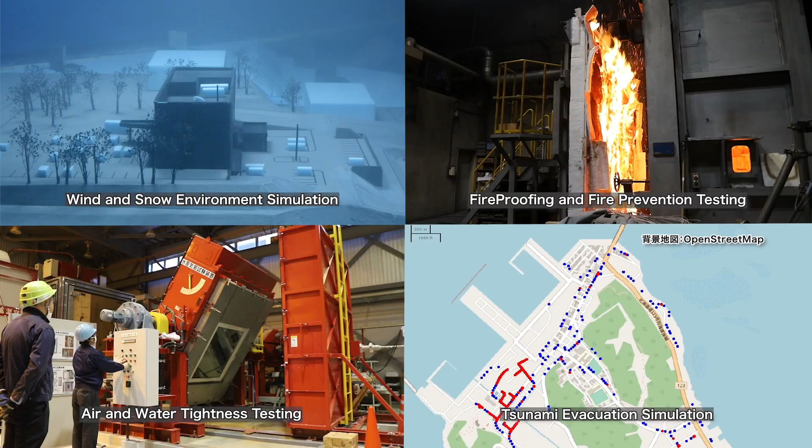The Building Research Department was established in Sapporo in 1955 to improve quality of life in Hokkaido through researching the planning and development of cities and housing in cold regions. We moved to Asahikawa in 2002.

The Northern Regional Building Research Institute, or Hokusoken, conducts research for both Hokkaido Prefecture and private companies, funded by the government and various foundations. Our research here can be divided into 4 main fields. Here is an overview of our recent efforts.

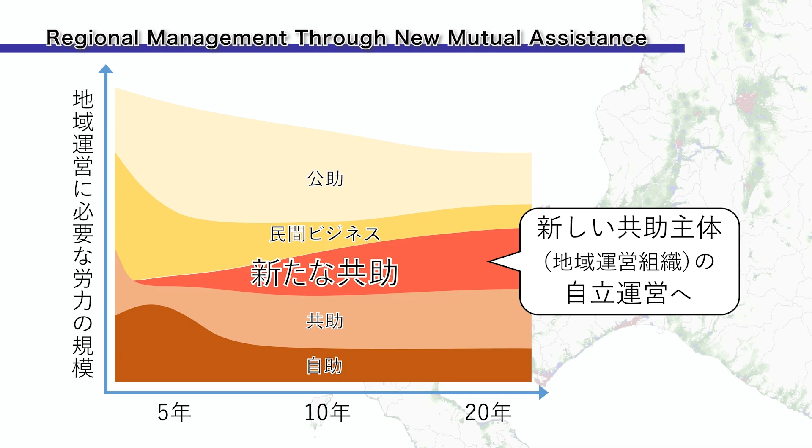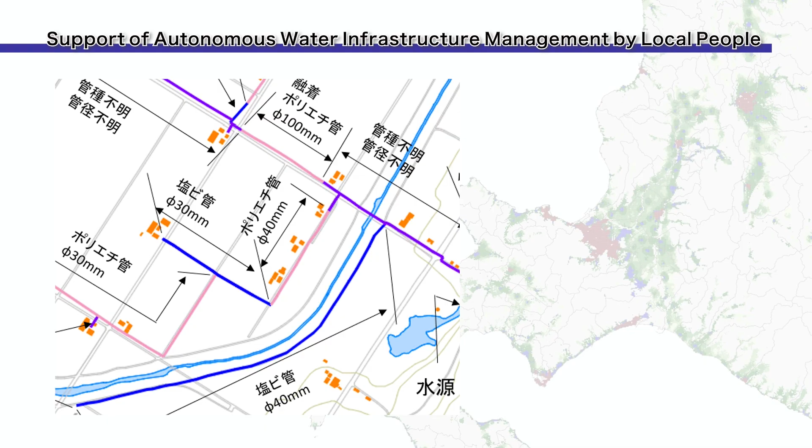Management of communities and housing. We are working on the research and implementation of regional management through new mutual assistance in communities facing declining population, falling birth rate, and aging population. For example, we are seeking a way to build systems to maintain local water infrastructures in cooperation with the local government, residents, and high school students.

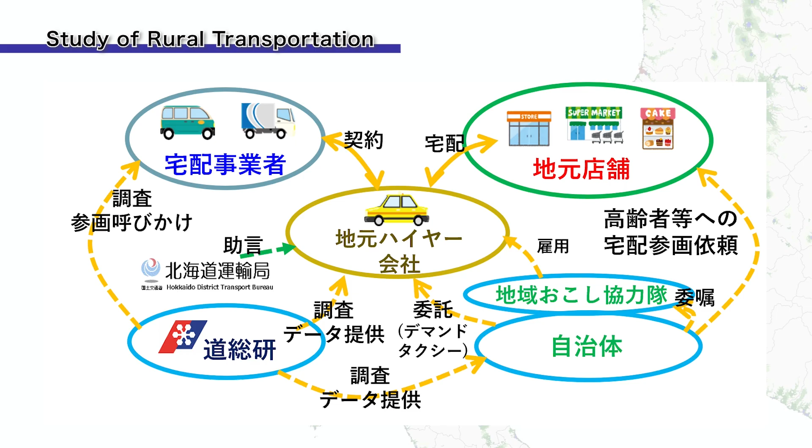We are also examining the feasibility of transportation operated by collaboration between local governments, residents, and businesses in regions where public transportation and local logistics have become difficult to sustain. In the field of housing, we cooperate with the government in policymaking and developing technology to popularize Northern-style housing as housing standard in Hokkaido. We are also working on enhancing the utilization of vacant houses and preventing houses from being left vacant.

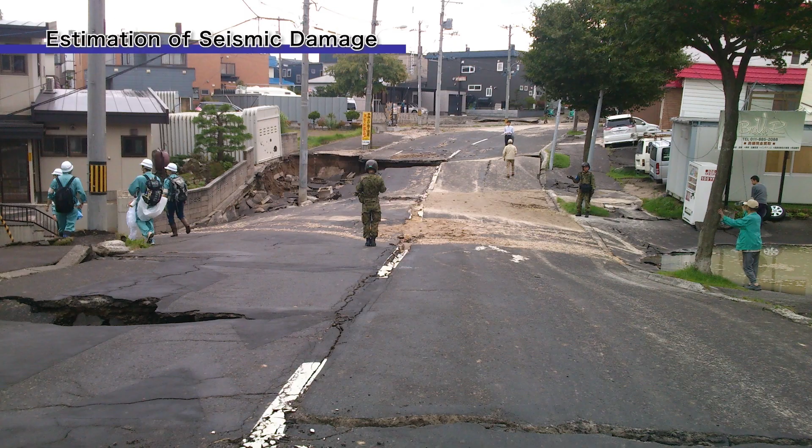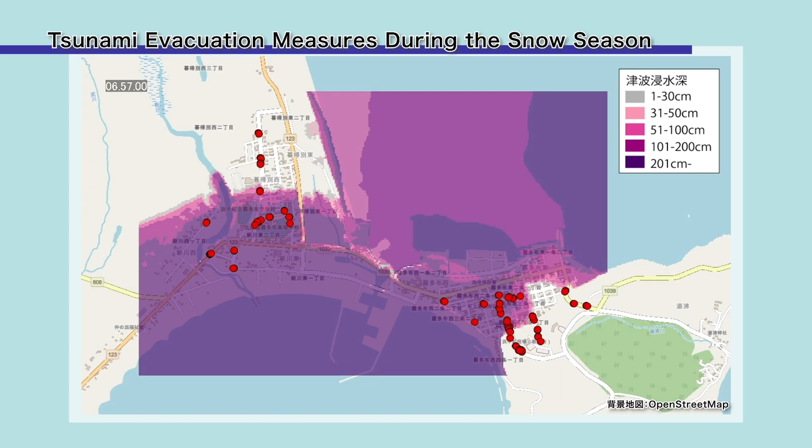Building safe communities. To promote disaster preparedness for earthquakes in Hokkaido, we are researching scenario earthquakes and damage estimation, as well as verifying the effectiveness of various disaster mitigation strategies. We measure actual evacuation speeds during the snowy season with evacuation drills to improve accuracy of damage estimates. And we assist in creating municipal tsunami evacuation plans as well as the construction of tsunami evacuation buildings.

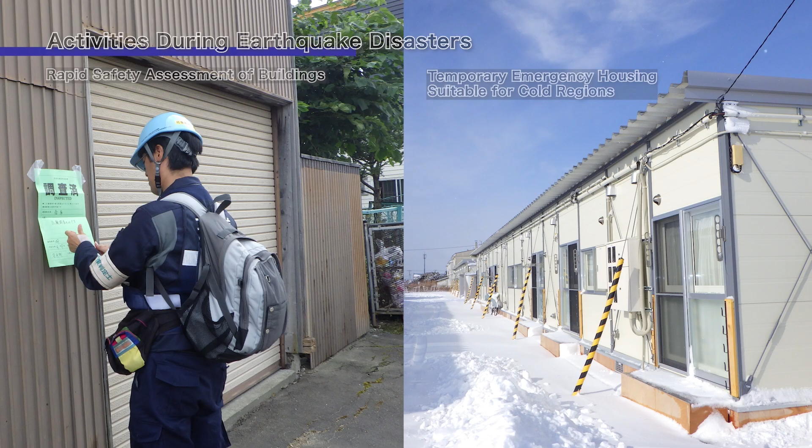During the 2018 Hokkaido Eastern Iburi earthquake, we collaborated with local governments to conduct rapid safety assessment of buildings and provided technical guidance on temporary emergency housing suitable for cold regions.

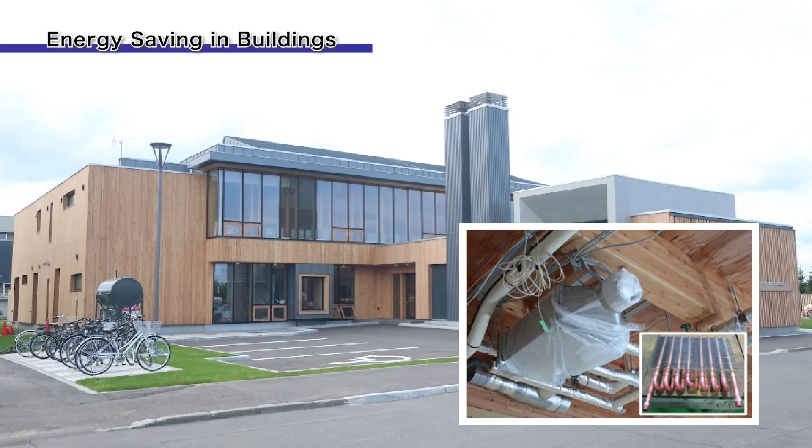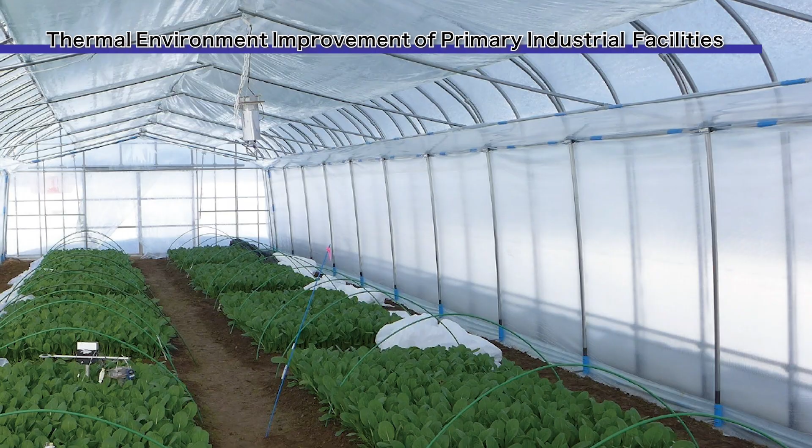Architectural environments and energy saving. We are developing technology of energy saving utilizing renewable energy for government buildings and schools. In collaboration with research institutes within Dosoken, we propose use of new technologies in environmental control to achieve thermal environments that enhance the productivity of greenhouses and other production facilities.

In response to Hokkaido's high demand for heat in the winter, we engage in research for energy conservation and utilization of renewable energy in the region.

Good quality building stock. In order to prolong the health of buildings, we developed rational, labor-saving inspection and evaluation methods to support municipalities in building stock management.

In order to increase demand for Hokkaido timber, we have developed and commercialized the fire prevention wood wall, which allows the use of wood for exterior walls at a low cost while meeting Hokkaido's high specifications for insulation. In addition to commissioned experiments, evaluation of architectural performance, and structural calculation conformity judgment, the Building Performance Testing Center conducts fundamental research aimed at improving measurement and analysis techniques.

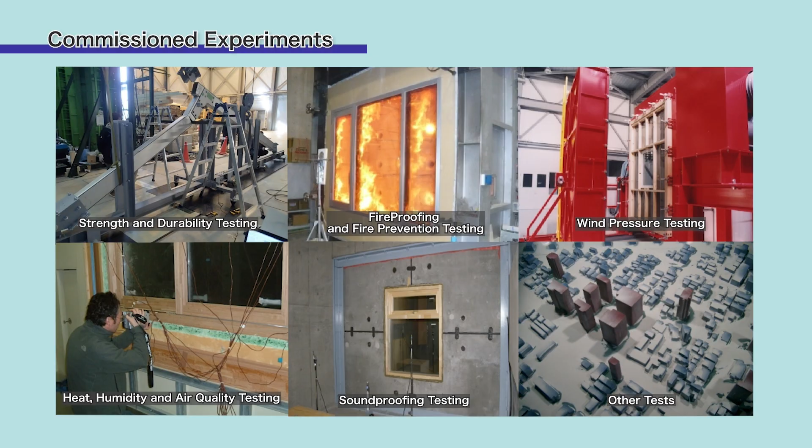For commissioned experiments, we provide tests as shown here. Usage of our facilities allows us to provide development of products and technologies for various companies and organizations.

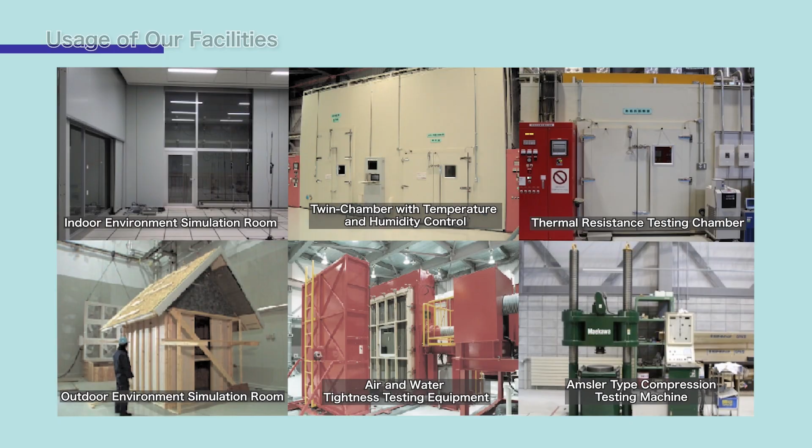This is a designated evaluation of architectural performance agency appointed by the Ministry of Land, Infrastructure, Transport, and Tourism for fireproof construction and development of fireproof materials. As the only agency of its kind in Hokkaido, it provides evaluation of architectural performance based on the Building Standards Act.

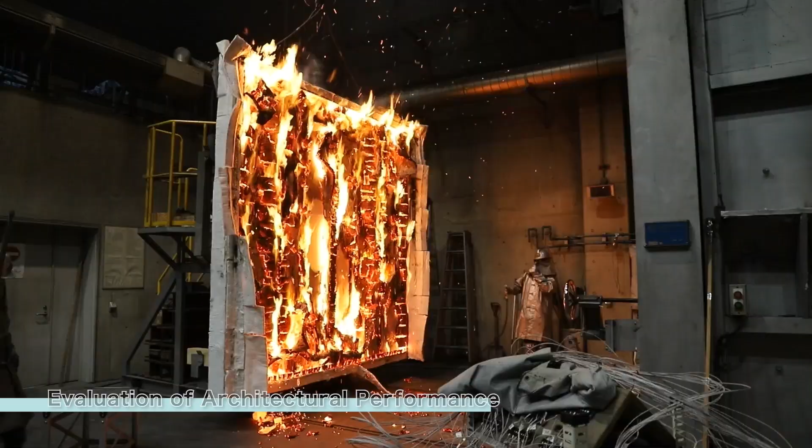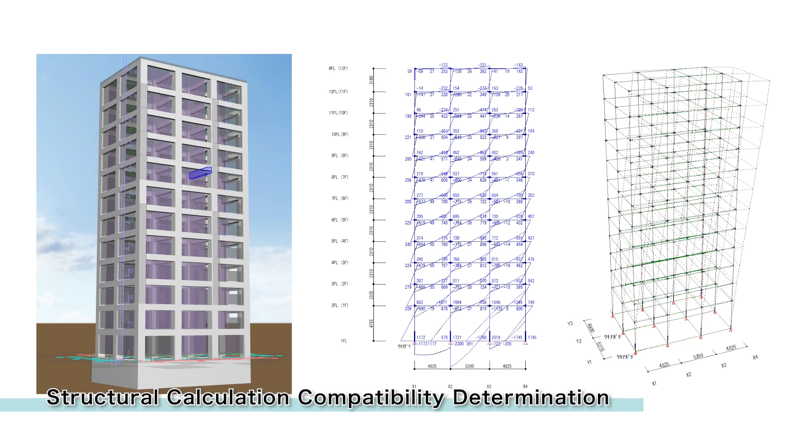As an institution designated by the Governor of Hokkaido, we conduct structural calculation conformity judgment services for buildings that require advanced calculations. We also have an office in Sapporo working in this division.

We report the results of our research and our technical findings through various methods. Every year, we hold a seminar for local administrative staff on community development. This is an opportunity for staff from Hokkaido municipalities and Dosoken to work together to develop strategies for managing communities while thinking ahead decades into the future.

In addition, we promote collaboration between industry, government, and academia by providing designs for public buildings, assisting municipalities with administrative issues, and conducting joint research with private companies and universities to address social needs.

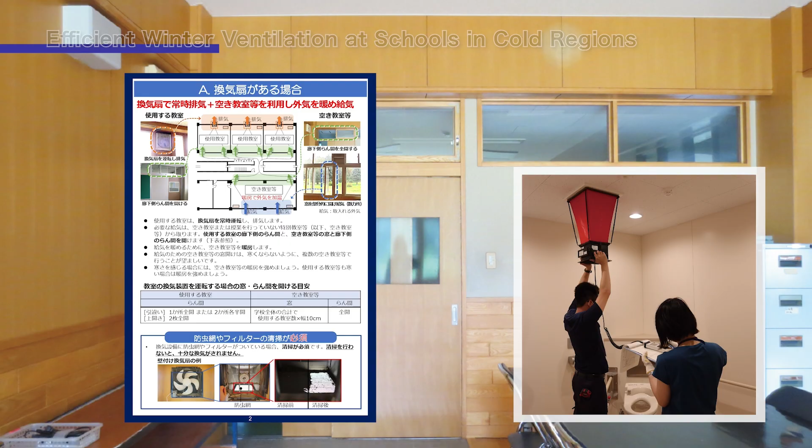As an organization with close ties to Hokkaido's citizens, businesses, and municipalities, we disseminate research results by holding seminars and lectures, as well as reporting information through our website, social media accounts, and various other means. We also offer public tours of our research facilities, technical consultations, and dispatched lecturers, so please feel free to contact us.

The following is an overview of the facilities used for most of our testing. In our wind and snow environment simulation lab, the effects of wind and snow on buildings are tested in a wind tunnel. To assist architects with blueprints based on adapting to environmental factors, we propose structural forms and layouts that prevent snow cover, snow accumulation, and snow drifts.

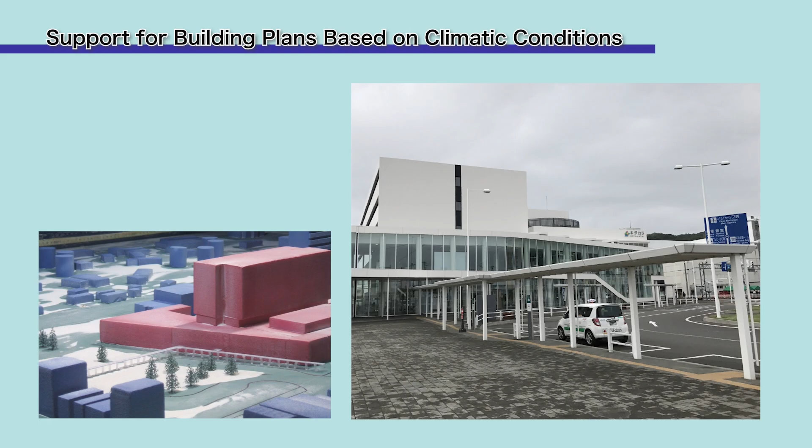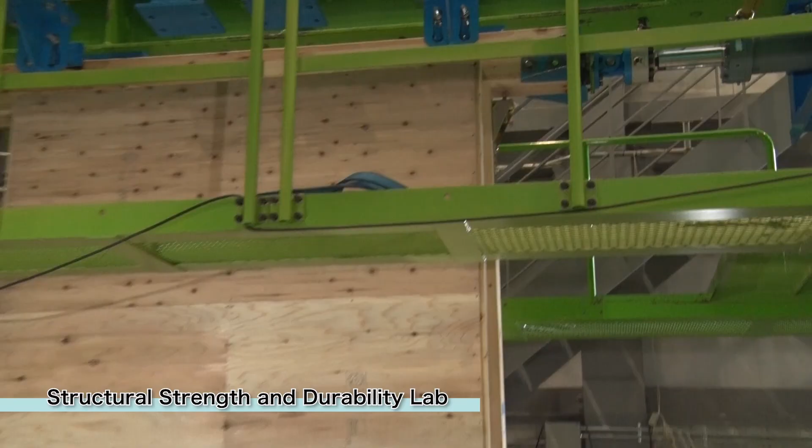Our structural strength and durability lab is equipped with 4 types of machines for testing durability, including a full-scale lateral load tester to measure the strength of buildings and materials against things like seismic forces. At our seismic resistance lab, structures are shaken in simulations using data from actual seismic activity.

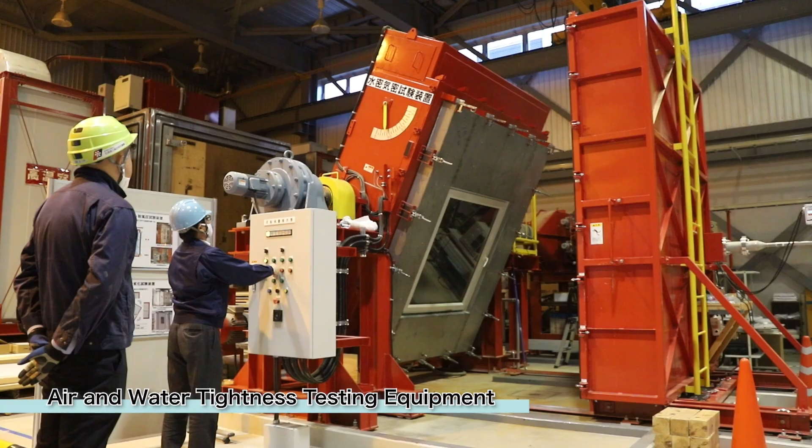Our twin chamber with temperature and humidity control lab has windows and walls placed between 2 rooms with a temperature difference, to test the performance of insulation in a simulated barrier between indoor and outdoor environments. Our air and water tightness testing lab uses specialized equipment to conduct tests on the damaging effects of wind and rain on windows and walls.

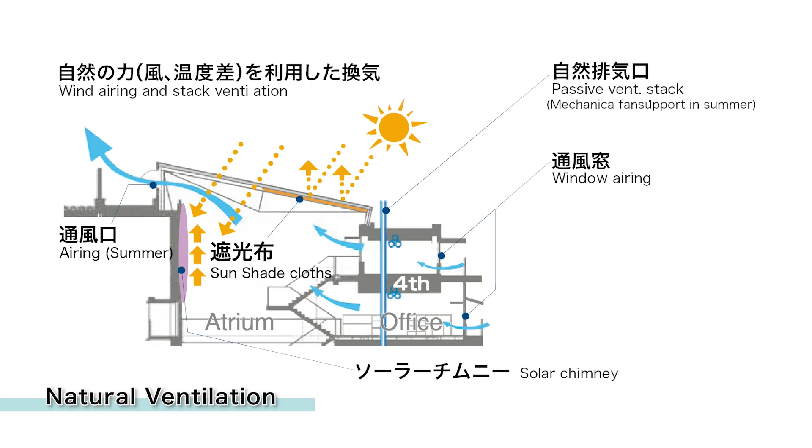This building was designed and constructed in 2002 using the results of our research on technologies to reduce environmental impact. Natural ventilation: we have reduced energy consumption by introducing a ventilation system that harnesses forces of nature, such as wind and air currents caused by temperature differentials between upper and lower levels of an atrium.

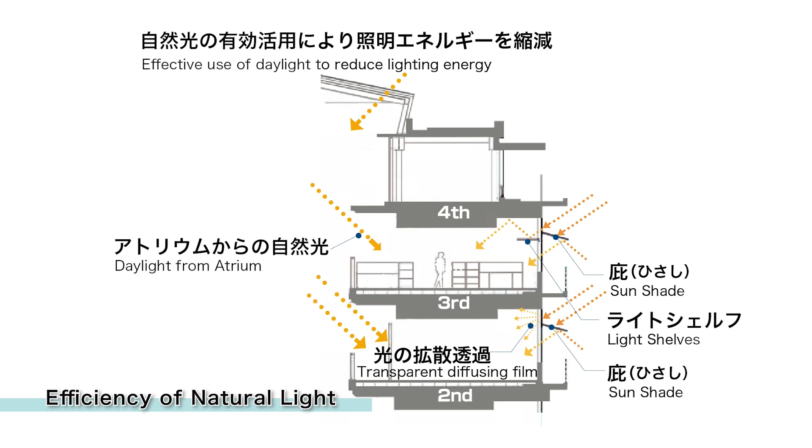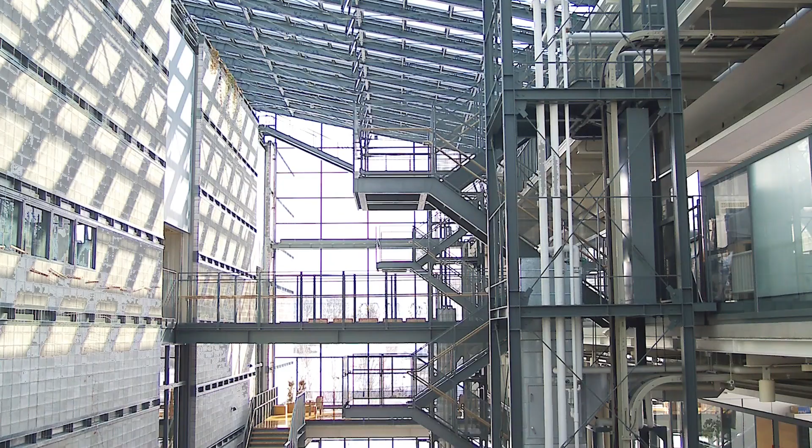Efficiency of natural light: in addition to diffusing and reflecting direct sunlight, natural light from an atrium is also utilized to significantly reduce energy consumption for lighting the offices. Through these methods and various other strategies, we have reduced energy consumption by more than 40% compared to a typical office building.

We continually review such operational methods to further reduce energy consumption.

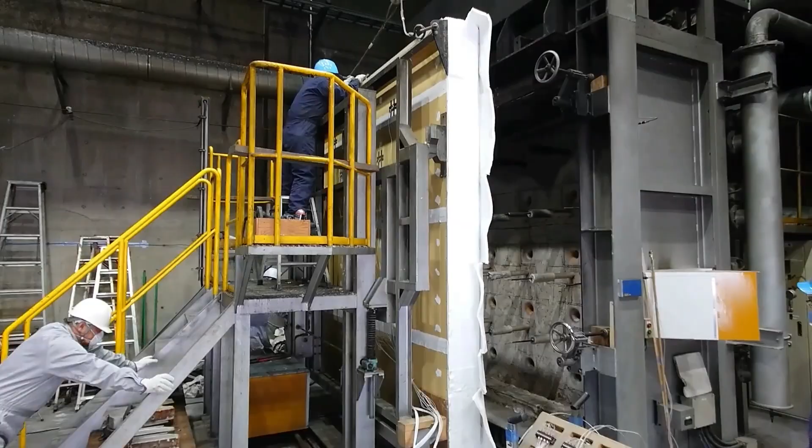The Dosoken Building Research Department has been conducting research and disseminating findings in the fields of architecture, housing, and community design in snowy and cold regions to provide support for improved living conditions and the development of construction-related industries in Hokkaido. Dosoken pledges to continue contributing to the creation of a sustainable Hokkaido.